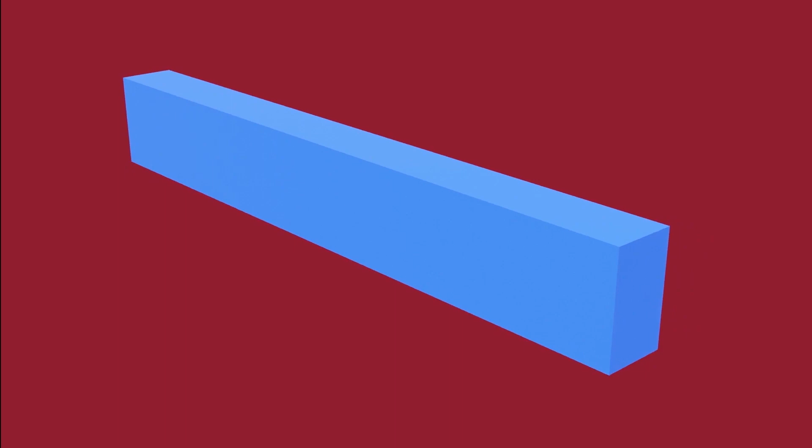Let us first discuss what is fiber. When we say fiber, say for example we have a beam. At the neutral axis, we have what we call the neutral surface, and that's where the fiber experiences no stress at all. The fiber on that surface does not experience any stress at all.

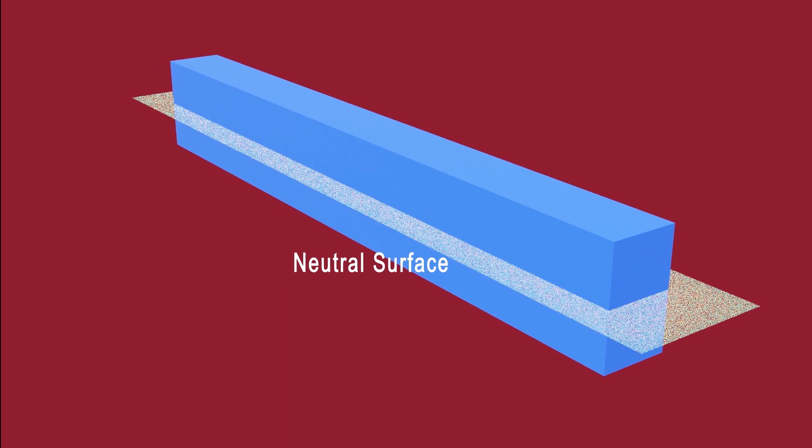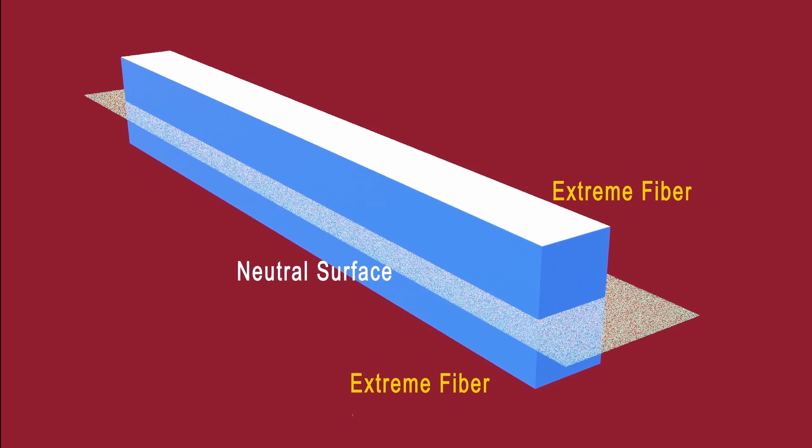And the extreme most fiber, the highest or the lowest fiber, there are two extremes: the topmost and the bottommost, that's what we call the extreme fiber. Now if the beam deflects like this, the uppermost extreme fiber at the top will be in compression and the extreme fiber at the bottom will be in tension.

So when we say fiber, think of the beam as having many fibers stacked on top of each other. The topmost fiber is the extreme fiber in compression, and the bottommost fiber is the extreme fiber in tension.

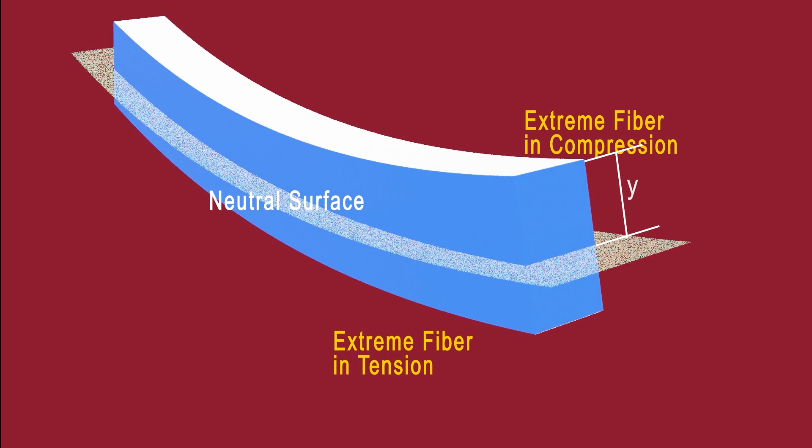So Y is this distance, from the neutral surface or neutral axis to the fiber you are considering - whichever fiber is being considered. But as designers or engineers, we always consider the extreme most fiber because that's the fiber that is most stressed, whether it's the extreme fiber in compression or the extreme fiber in tension. That's what is meant by fiber.

Next, we have I. I here is the moment of inertia of the cross-sectional area with respect to the neutral axis. So you need to first determine the neutral axis, then find the moment of inertia with respect to that axis. That's what I means here.

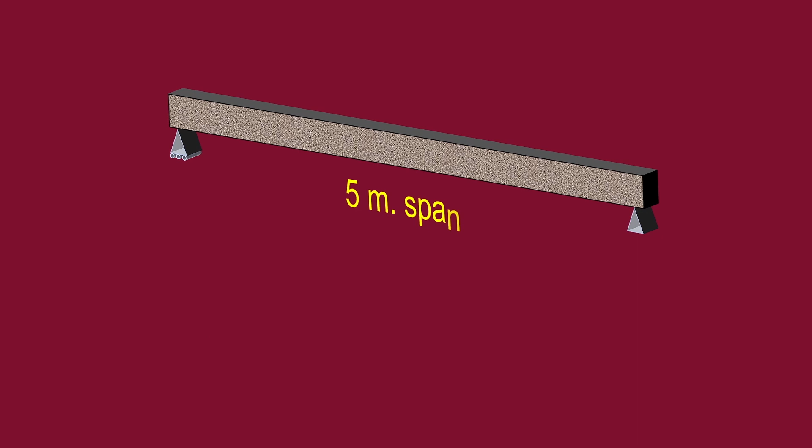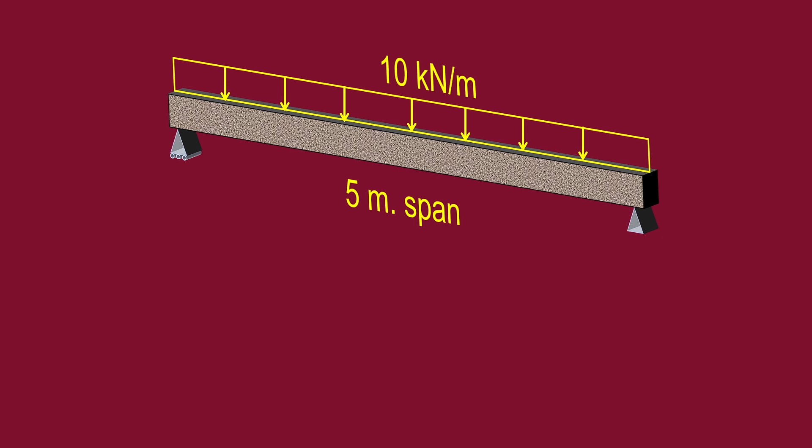Okay, let's have an example. Let's say we have a beam with a span of 5 meters, subjected to a uniformly distributed load with a magnitude of 10 kilonewton per meter. And let's say the material we'll use is wood, a lumber with flexural strength FB equal to 10.3 megapascal. So we already determined the flexural strength of the material to be used as the beam, and it was found to be 10.3 megapascal.

So we will find the dimension of the beam. What should be the dimension of the beam? First, we need to know what the reactions are.

We have the reaction. Since this is just a uniformly distributed load, the beam is only subjected to a uniformly distributed load of 10 kilonewton per meter, so we can easily find the reactions, and they were found to be 25 kilonewton at both supports.

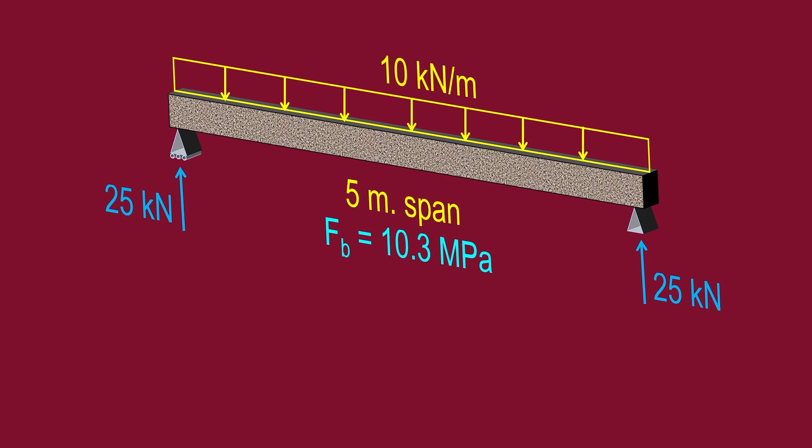Now that we've determined the reaction, for us to be able to design this beam, as I said earlier, our design will be based on the section where the maximum moment occurs. So we need to find the maximum moment. And since this beam is only subjected to a uniformly distributed load, we can immediately know that the section where the maximum moment occurs is at the midspan, since it's uniformly distributed. So for sure, the maximum moment is at the midspan.

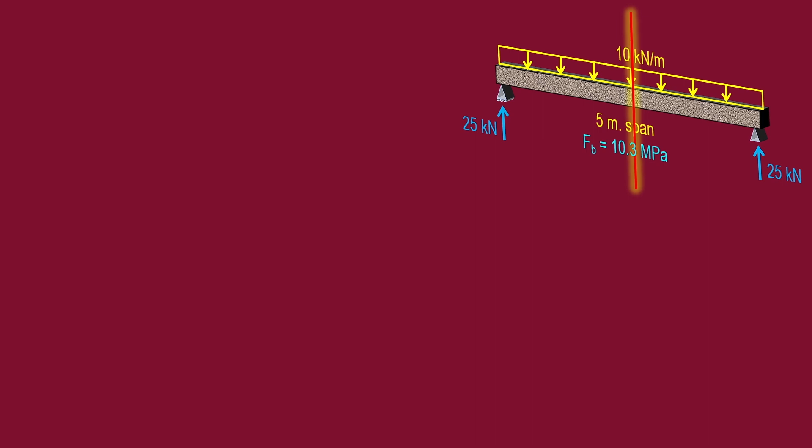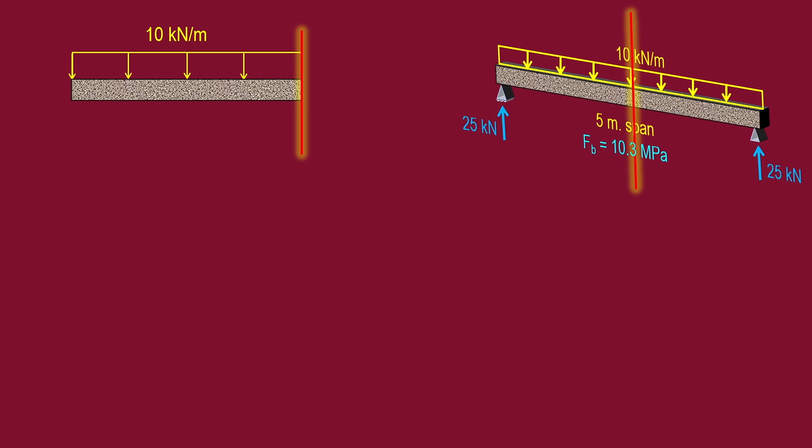So we will pass a cutting plane at the midspan like this, and we will isolate from the cutting plane to the left of the beam. So we have here the cutting plane, and we isolate the left of the beam. So, okay, this is the beam, and also we have here the 10 kilonewton per meter, and also the reaction, which is equal to 25 kilonewton, and this distance is equal to 2.5 meters.

Okay, and we need to find the moment here, the reactive moment. Now, to find the moment, we will sum the moment at the cutting plane here, and we will arrive at this equation.

So the moment is equal to 25 multiplied by 2.5 minus the uniformly distributed load, which is 10, times 2.5 times 2.5 over 2. And simplifying this equation further, we will get 31.25, that is in kilonewton meter.

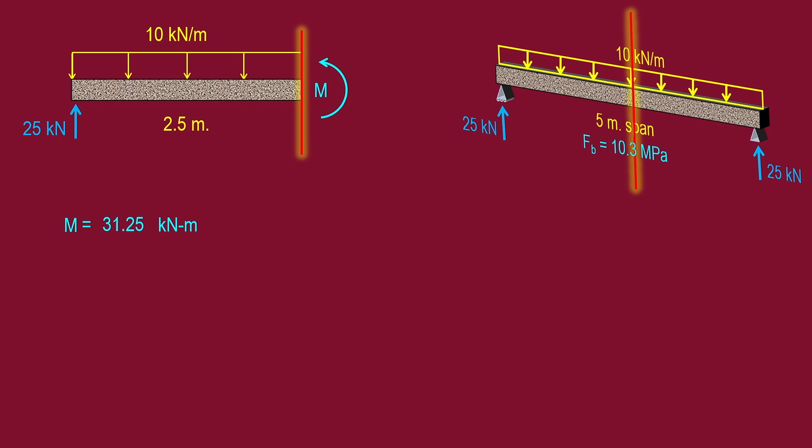So this is the magnitude of the moment, of the reactive moment at the cutting plane. And this is also the maximum moment. Next step is we will now determine the dimension of this beam.

Now take note, this is in rectangular form, and we will use the formula, the flexural formula, FB is equal to My over I.

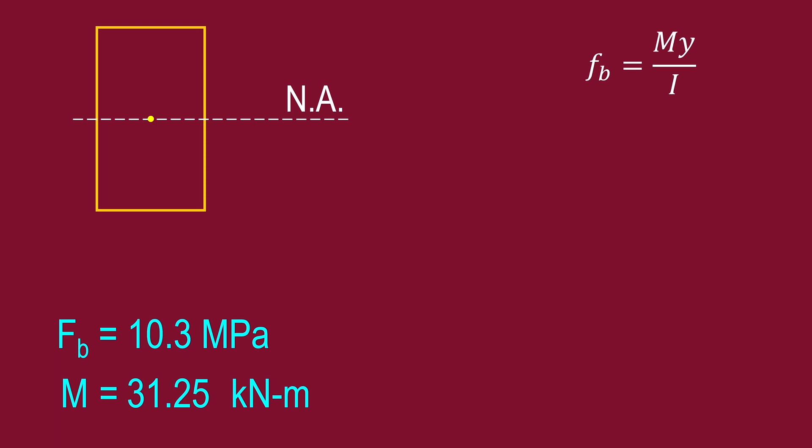Now, based on this figure, we know that the centroid of this section is here. And the axis that passes through the centroid is what we call the neutral axis. And that's the axis also where the neutral surface passes through, the fiber where the neutral axis is located, as I have shown you earlier.

Now, the height of the beam, we call it the depth of the beam. And we also have here the width of the beam denoted by B. Now, we need to know what is the dimension of this beam.

Now, when you design a beam in real life situation, you always see to it that your design is like this, mas mahaba yung depth niya kaysa width, dapat ganun at hindi ganito. Because if your design is like this one, then your beam will be prone to excessive deflection. So instead we use this one, dapat yung design mo is like this one.

So we, as much as possible, try to avoid that. Now, for the purpose of this discussion, we will use

0.4 as the ratio of the width to height. So we will use this ratio, 0.4, as the ratio of B to the depth, width to the depth. Now in real life situation, you as the engineer, ikaw yung bahala kung ano yung ratio ng width to depth. Basta, yun nga yung sinasabi ko, we try to avoid this type of cross-section.

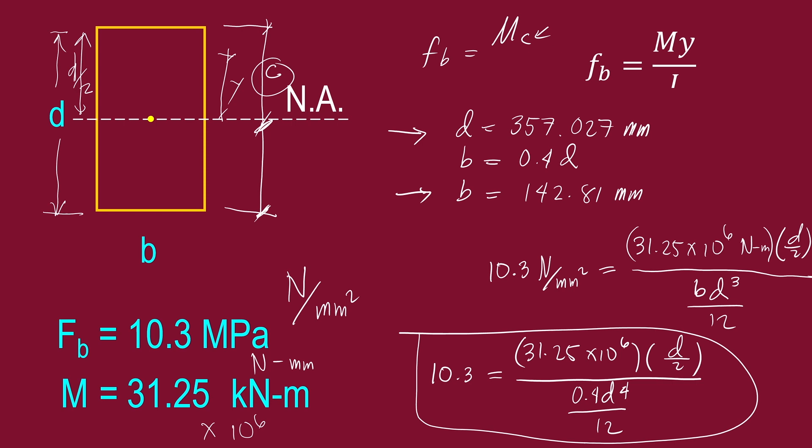And the value for B, take note that our B is equal to 0.4 of D, the depth. So substituting this value here, we can get the value of our width, and that is equal to 142.81 mm. We have here the dimension, the depth and the width of the beam. So we have 357.027 for the depth and 142.81 mm for the width. This is our value for the depth and the width.

Okay, so this is our beam. Now, where does the reinforced concrete design come in? Before we go to that, let's think about this first.

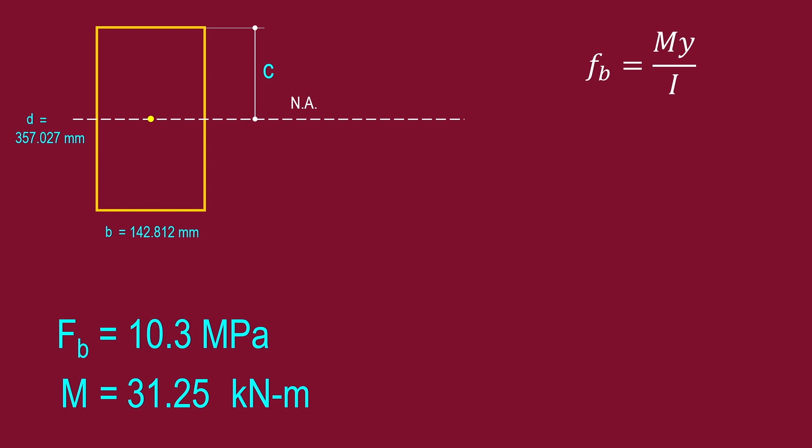If you want to draw what we call the stress diagram for the beam, it would look like this. Let me extend that. So the stress diagram of this beam, this cross section, would look like this, something like that. We have here the maximum stress in compression, and we have here the maximum stress in tension. Compression here, and this is tension. So that means, if we consider this fiber, it has a corresponding stress.

Take note that our stress is a function of y, and the y is the distance from the neutral axis to the fiber you are considering. So if this is the fiber you consider, the stress you get is this one. If you consider this fiber, the extreme-most fiber, the stress you get is this one. And we already did that, and that's the stress, 10.3 megapascal. This is actually the flexural strength, so that's the capacity, the capacity of the material used as a beam.

Now, if you are considering the fiber in the neutral axis, take note that its stress is 0. That is because your y here is 0. So based on your formula, if y is 0, the value of your stress, your FB, is also 0. Take note that stress is a function of y, so as y goes higher, your stress also increases. Same here, if you consider this fiber, the stress you get is this stress, which is actually the same. This stress and this stress are actually the same, because your y here and this y are actually the same.

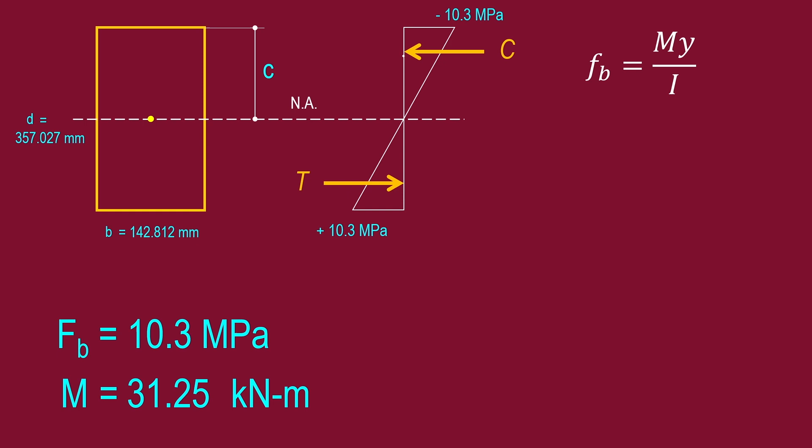So yung magnitude ng T at C is actually because this stress here, if you look at it in 3D, parang ganito yan. Okay, so we have here the C and the T. So this is the neutral axis and the distance from the neutral axis to the extreme-most fiber is C.

We have here the 10.3 megapascal and we have here the positive 10.3 megapascal. So paano natin malalaman yung magnitude ng T at ang magnitude ng C? Simply, we just need to find the volume of this stress diagram. 'Di ba? Triangular prism siya. So we can determine the magnitude of the C just by solving for the volume of this prism, of the stress diagram, which is in a form of prism kung iti-3D natin. Okay, so we have here the value of C.

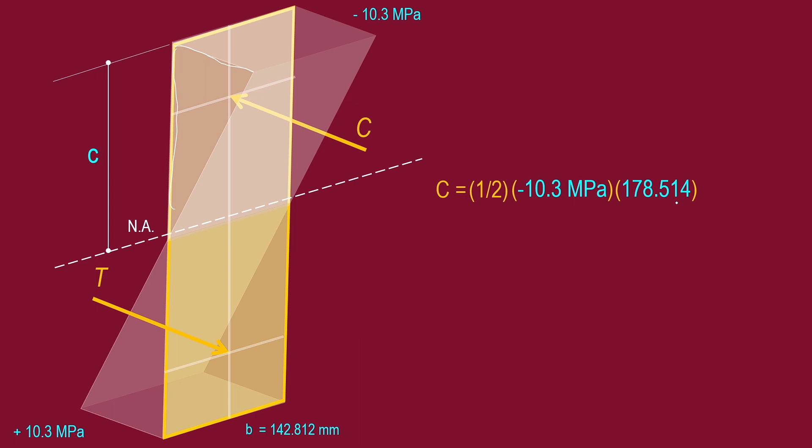So itong C, that is the volume of this prism. Since the base is triangular, masasabi natin the formula for triangular shape is 1/2 multiplied by the base, and the base is 10.3. So this one here, this is 10.3 multiplied by C, and that is 178.514. Paano nakuha yung 178.514? Alam naman natin ang distance na to, 'di ba? The height of the beam, the depth of the beam, alam naman natin yung depth ng beam.

You just divide it by 2 para makuha natin yung distance na to, which is equal to C, 'di ba? And that is 178.514. Okay, this is just the area of this one. Area pa lang yan, hindi pa volume. So we need to multiply pa this distance, in the distance. And that distance is equal to, you have here, yung width, yung base, the width of the cross section.

And that is equal to 142.812 mm. So multiplying this one, we'll get C is equal to negative, because negative here, negative 131,293.798 Newton. In Newton siya. So if I will convert this into kilonewton, we'll have negative 131.294 kilonewton. This is the value of C. This is the value of this C here.

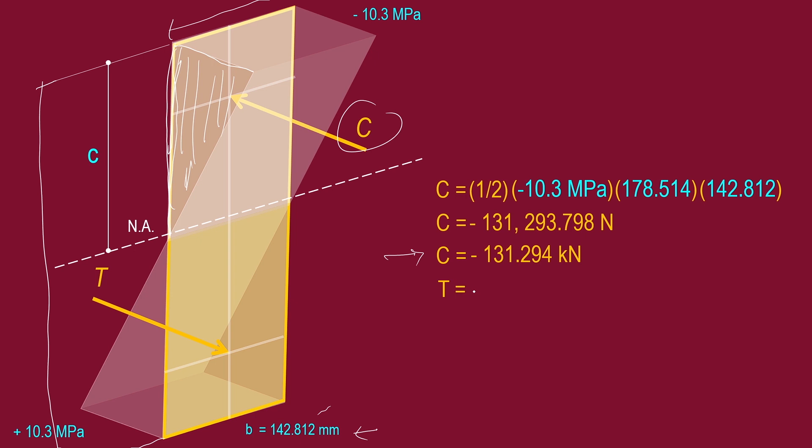Now, since pareho lang naman sila, ang pagkakaiba lang nila is yung direction nila, then we can immediately solve for T, that is actually positive 131.29 kilonewton. So this is our value for C and T.

Okay, so going back to the 2D version, so ito yung 2D natin. So we have here the C, that is 131.294. Yung T naman is also 131.294 but positive siya to denote na tension. Okay? Now, since pareho lang naman yung magnitude nila, this C and T, so they have the same magnitude but they are oppositely directed. So clearly, naka-form tayo ng couple. 'Di ba? Couple yung tawag dun sa two forces with the same magnitude, oppositely directed and has a distance separated by a certain distance, then we have a couple.

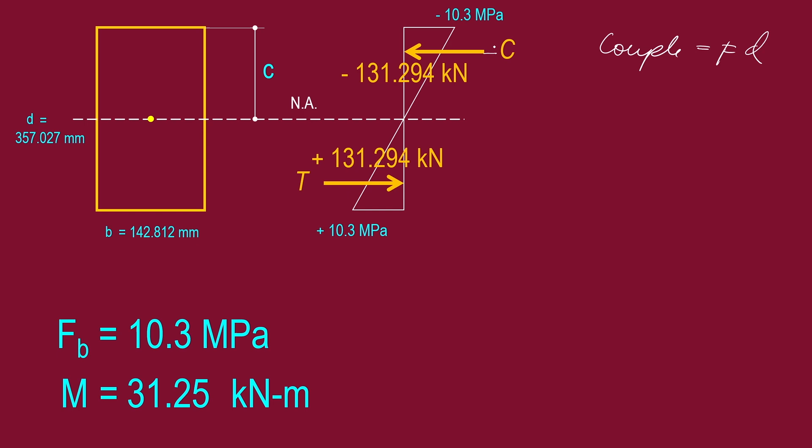Okay? And the magnitude of a couple is just equal to ano ba? The magnitude of the force multiplied by the distance between the two forces. Okay, so yun yung magnitude ng couple. Okay, so we just need to use the magnitude of the force, and since pareho lang naman ang magnitude nila, 131.294, never mind the negative, never mind the positive because it just indicate the direction of the force. And we also need to multiply it by the distance between the two forces and this distance.

That is this distance. So we can easily find that distance, 'di ba? So we can easily find that distance since okay. This distance here, ito yung distance na to from here to here, that's actually equal to C, 'di ba? Or should I say 357.027 divided by 2. 'Di ba? That is this distance. Since this is triangular, alam naman natin kung saan yung centroid ng triangle.

That is this distance is actually equal to 1/3 of C, 'di ba? Since this is C. So kung 1/3 dito, yung distance from here to here, that is 2/3 of C. 'Di ba? 2/3 of C. Same here from here to here, that is also 2/3 of C. 'Di ba? 2/3 of C.

So 2/3 of C plus 2/3 of C. Since this distance is equal to depth of the beam, this other distance is 2/3 of the depth. So the distance between the two forces, the couple, is 2/3 of the depth.

So if I were to find the magnitude of the couple, I'll just take the magnitude of the force and multiply it by their distance, which is 2/3 of the depth. So the couple is equal to 131.294, this is in kilonewton, multiplied by 2/3 of D, and D is equal to 357.027.

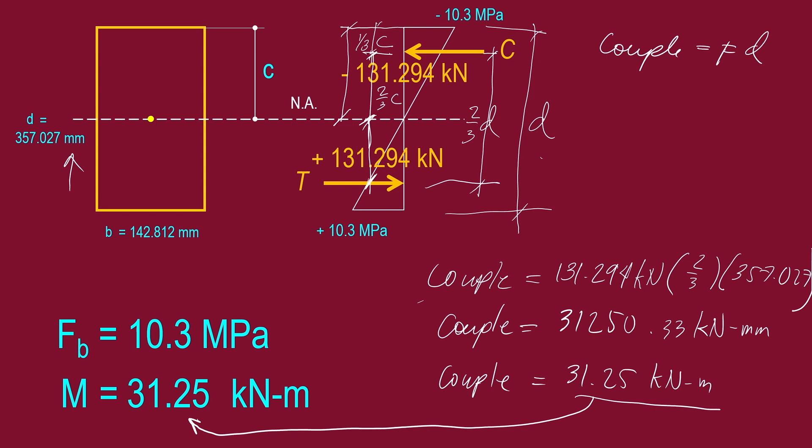Now for the case of concrete, studies and experiments by different scientists and engineers found that concrete is very strong in compression but very weak in tension. So what does that mean? If you use concrete here, the tension force T will not exist, because concrete cannot sustain that tension, the 131.294 kilonewton here.

So what did the scientists and engineers do? Since concrete is very weak in tension, to compensate for this force, we place a bar, the reinforcing bar. We place steel there, and that steel bar is there to compensate for what the concrete is lacking.

Because concrete is weak in tension, fortunately the steel bar is very strong in tension, and also strong in compression, but it is very expensive. So we just use a reinforcing bar instead of replacing the whole area with steel, since that would be very expensive.

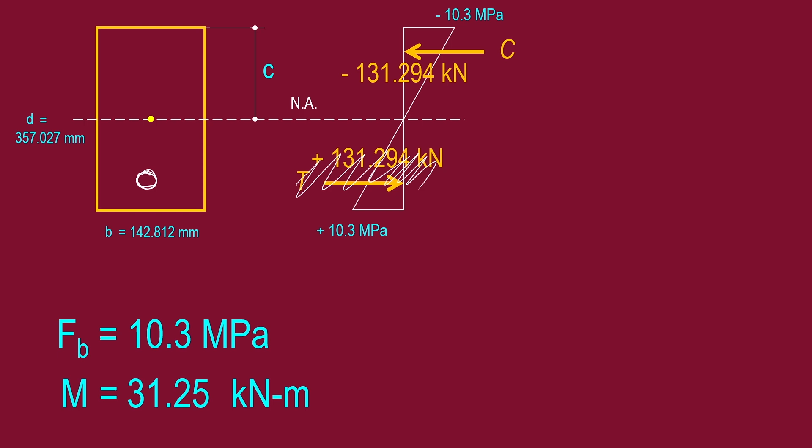So to compensate for what the concrete is lacking, we place what we call the reinforcing bar. That's why we have this course, which we call Reinforced Concrete Design.

So on the next topic, in the next video, we will discuss how we design a reinforced concrete beam. I guess this is the introduction for the course Reinforced Concrete Design.